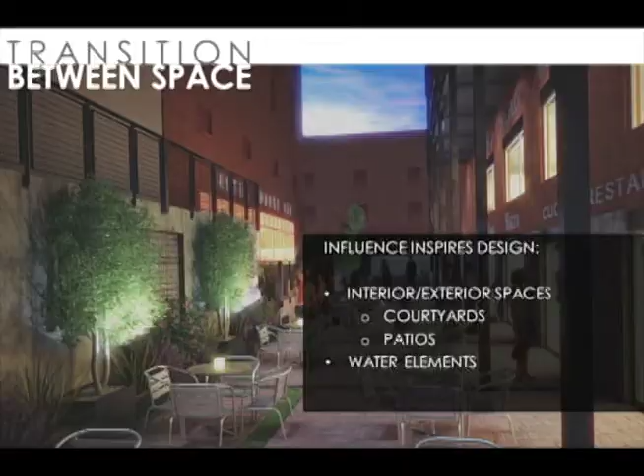Right. So tell me about this particular slide that we're looking at here.

So basically, I guess it's that transition between indoor and out. You can't build the Alhambra in El Paso with the very limited budgets that we have here. It's very hard, especially if you're trying to build with $100 to $150 a square foot - it's kind of impossible to do these palaces. But you can take the idea of the patio, the courtyard, water features, and try to incorporate that into my architecture.

Okay. So this is the animal hospital on the east side. Where could we find this? It's close to Montana, and what's the intersection? And Wedgewood, I believe. Okay, Montana and Wedgewood.

Okay, I can tell you a little bit about it. I had a client, Dr. Garza, and his wife. They approached me to do a new clinic.

So this is what their clinic was like. You can see here on the right, a very old building. They wanted to expand and make a bigger clinic, going from about 1,500 square feet to 5,000 square feet. But it was a challenge because there was an easement running between the property. They didn't have enough parking, and it was hard to fit on either side. We couldn't fit the whole program for the doctor.

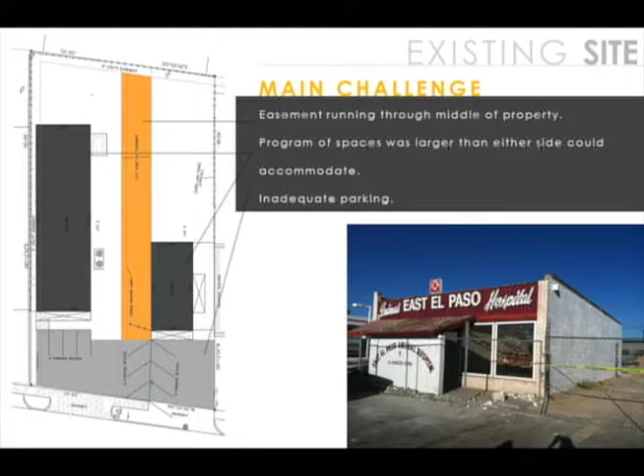So did you immediately tell them this has to go? Well, I told them I would look at it to see if it was feasible to leave it. But after looking at it and coming up with a concept of what we wanted to do, it was clear that it had to go and we had to start from scratch. But the challenge was that he wanted to operate the whole time we were doing construction. One of the big challenges is that he wanted to keep operating and never close.

So we had to work around that. At the end, we added a trailer out at the job site, and he worked out of the trailer. Then when half of it was open, he would use half of the building, and so on.

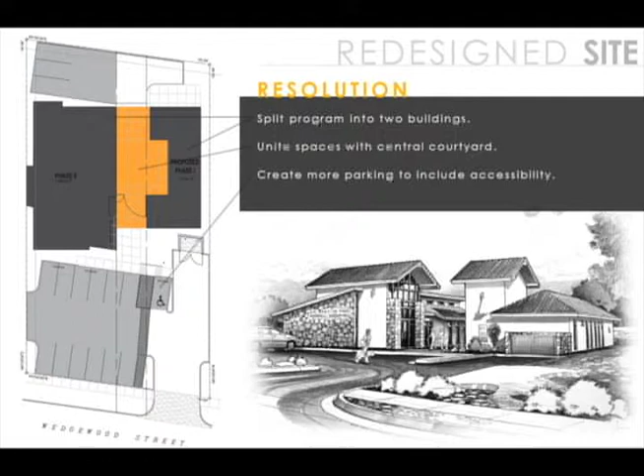So here's the solution. I created this same idea that I learned, to create this courtyard that would be kind of the glue that held this together. That's how we came up with this project.

When was the moment you went, this is where I can use my courtyard idea? You know what, I wasn't even thinking about the courtyard. It just kind of happened that once I started looking at the program of spaces and how things need to function, it just made sense to do it. I think it's something I subconsciously always think about, but I don't approach my projects saying that's what I'm going to do. It just, for whatever reason, appears in the project, and it seems to be an element in the projects I do that always helps me as an organizing element for my architecture.

So basically, the form of the project was that he was really in love with this metal roof system he wanted to use. That was kind of the only thing aesthetically, and he wanted rock. So that was the starting point of what this was going to look like. But there was an issue with the orientation of the building, so we wanted to have a nice entrance to draw people in. And if you look at it and walk through, it seems like just one building. Even though we have this easement running through the property, it's going to seem like one continuous building.

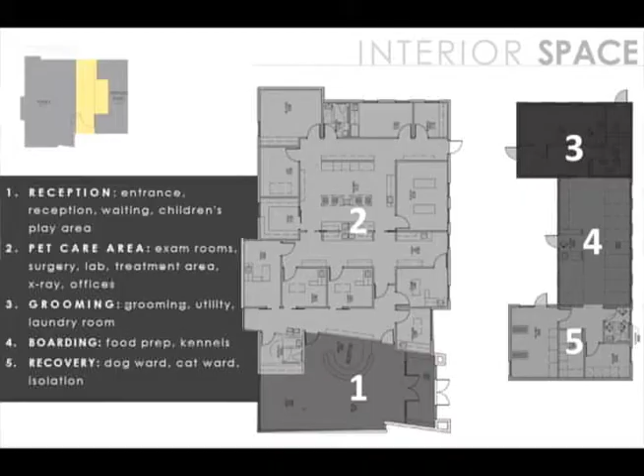I noticed on the previous slide that you have a prep area. Did you have some health issues that you had to address when you were designing it? Yeah, they have a lot of requirements that the doctor had that we had to meet, based on animal health and not having things spread around.

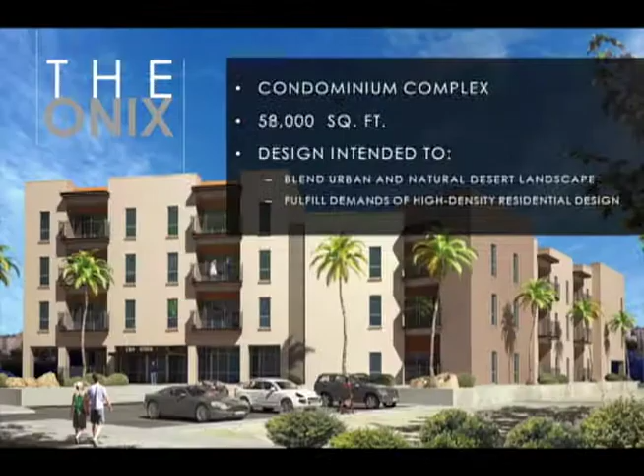So condominium - that's very different than the veterinary facility. How did this come about?

So the condominium project is located on the west side of El Paso, and it was actually a builder who does homes, but the economy had crashed, and he wanted to try to get into a condominium project. It was hard to get. At the end there were going to be apartments, but the idea was to do a high-density, very dense urban project that would fit in that area.

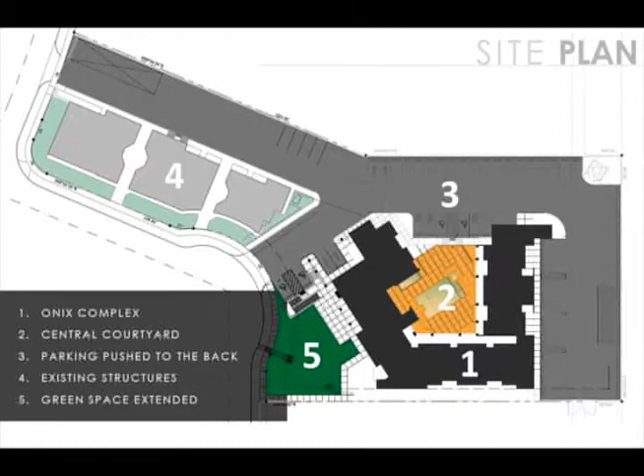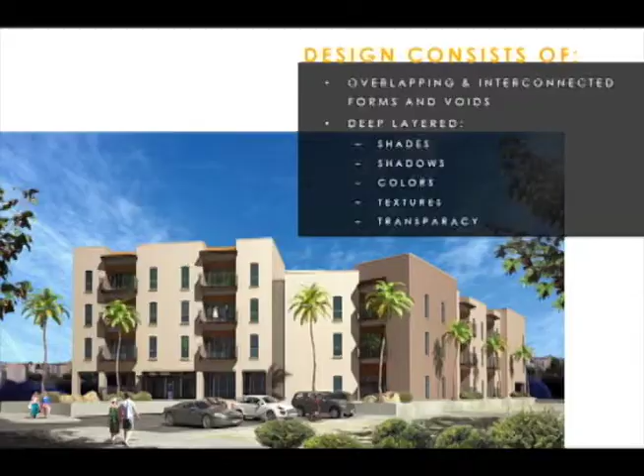The good thing about the site - it's not a very big site, but he wanted a lot of units. What's good about it is it's close to shopping, really close to Sunland Park Mall, close to restaurants, and also close to some medical and office buildings. So it was a good fit to try to put this type of facility there and have a good mix where you could actually work in that area, or if you're just there on weekends, you can walk to the mall or walk to get dinner. It's more the idea of a pedestrian type building.

Okay, so you mentioned the crash - what year did you do this? I started this about 3-4 years ago, and it was held up, and we're barely starting construction right now. So sometimes you start a project and you think you're going to finish it, and then you stop, and you go, and you stop and go. You just have to deal with those kinds of issues.

So the idea again was to create this courtyard. It just helped to organize the space again, but we pushed the parking to the back because we didn't want - we always have this parking lot in front of all these buildings, but they're really not nice spaces to be in and walk around in. There were also adjacent buildings to the left of the project, and we wanted to tie into that fenestration and massing so it seemed almost like one big project.

And then the other thing we did was expand the green space toward the front. So when you visit this building off the street, you really don't see the parking - you see a green space, then you see the entrance, and behind that you have the courtyard that ties everything together.

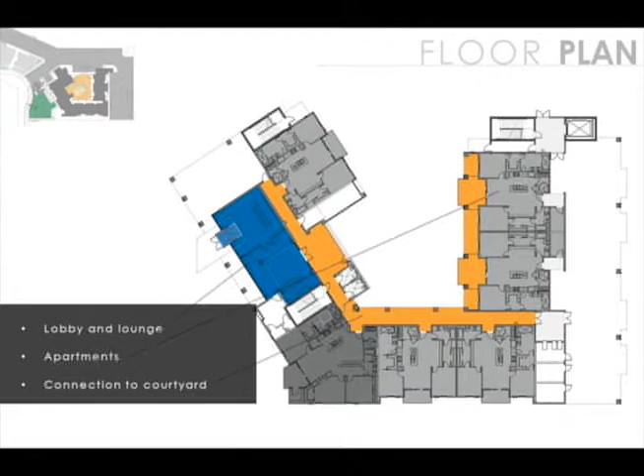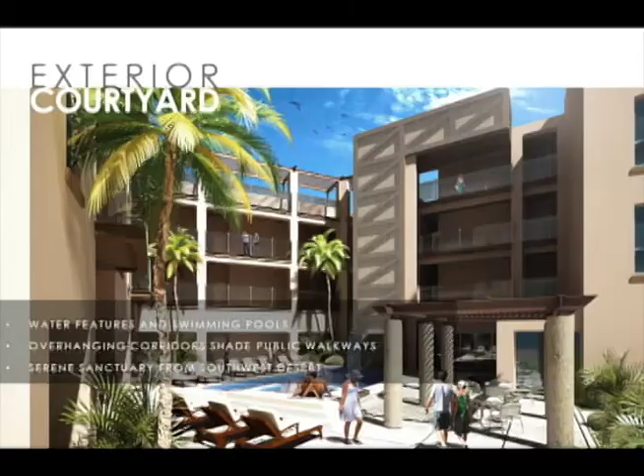So how was it working? This is a completely different client experience, a developer. Our idea of the developer is all he cares about is making money. The big issue here was always money. What is this going to cost me? What am I going to do?

We actually went through different renditions, changing window sizes, changing materials for the balcony instead of glass. We went to another option. You have to be very creative and stick to your guns, saying okay, I understand you have this, but we still need a rail. So can we find a solution or a nice design that still has this rail, but isn't pure vision, while still respecting the concept, the forms, the shades and shadows you're trying to create.

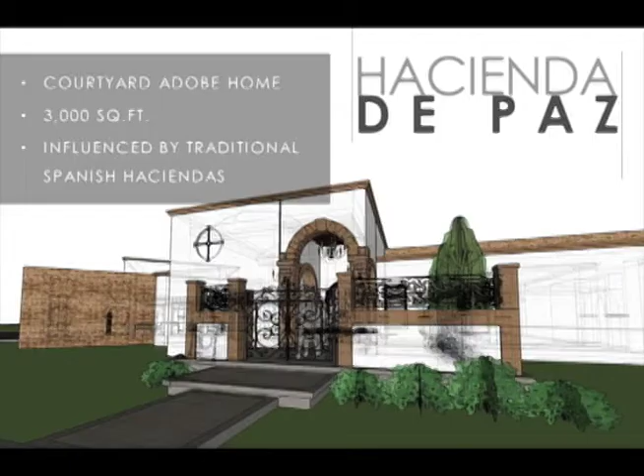Another different project. As you can see, I work on all sorts of projects because here in El Paso, if you're a small firm, you cannot just work on one type of project. You've got to work with whatever falls in your lap.

So this next one was Hacienda de Paz. A completely different client, an older couple, and it was going to be their dream home that they'd always been thinking about for years, that they're going to probably live in maybe 20, 30 years. It was out in the valley, and they wanted something that would reflect their memories as children living in Mexico. So the idea of creating this hacienda-style adobe home came about, and that was the starting point.

So again, thinking of that idea of the hacienda and the patio, we started talking about designing this, and we came up with some sketches. The concept was going to be a series of pods or buildings that would embody the experiences or activities that the couple wanted to do in the home.

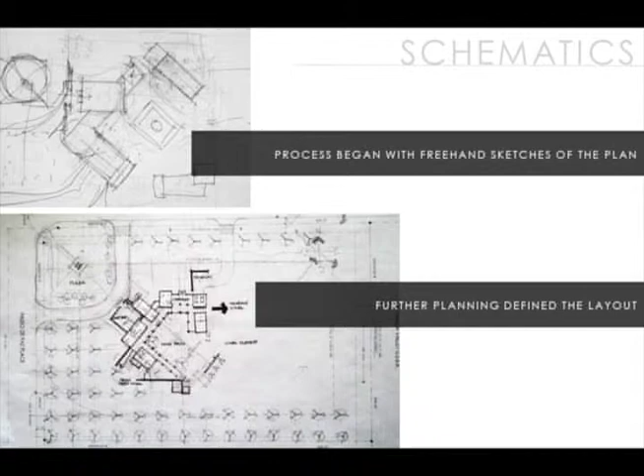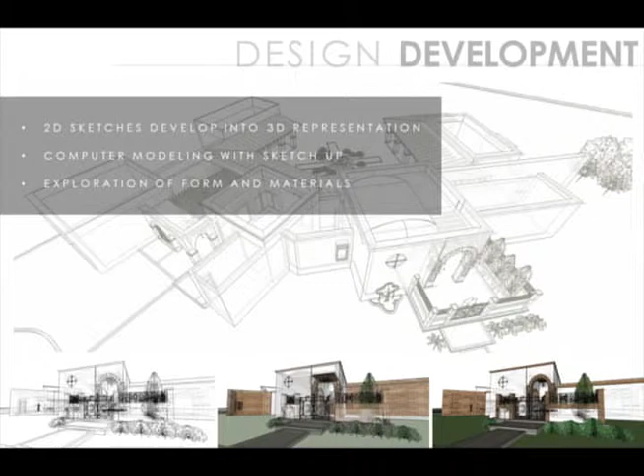From that conceptual idea, we started playing with the forms, making sure it's a modern building but still ties back to their culture through the materials we use and the way things are fenestrated on the building. It's still not a true hacienda home, it has a flair or a different type of architecture, more modern.

You mentioned adobe, so did you guys use adobe, or was that just the starting point? We looked at different options. Unfortunately, with this project, it's on hold right now, because the clients fell in love with the idea, but to do the adobe, you can't find that here in El Paso anymore, or even in Juarez. That used to be a big material used here at the border, but the only place you could find it now is up in Santa Fe, and to ship adobe from there or Las Cruces was super expensive.

So one of the ideas we were looking at is either doing hay bale or just stick frame, which I don't really want to do. So we're still kind of up in the air, and who knows if they are really going to do that. That happens sometimes, you get hired to do a project and at the end they decide it's too expensive, or we have to change and redesign and do something different.

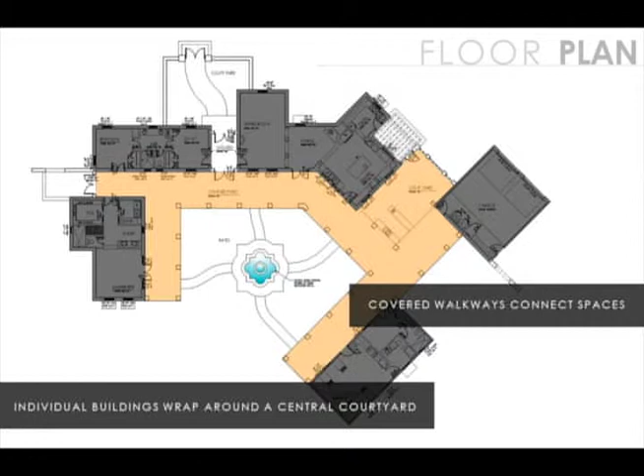So I was talking about these pods, kind of different experiences. She cooks a lot and gives lessons on cooking and dishes, modern Mexican dishes. Part of it is learning, and food was a big part of their experience. One pod was so she could teach other people about her culture and the way she cooks.

And then there's the kitchen, if you can see it over here in this area. It's almost half, or bigger than any of these areas. The whole kitchen's like that, so it's going to be a big gathering place. That was very important to the client.

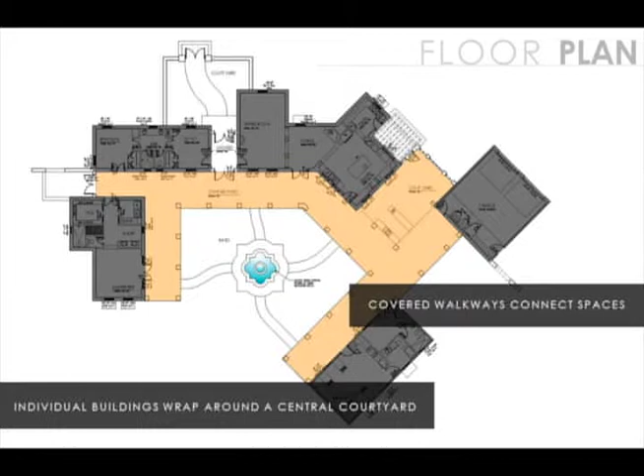And then we have the relaxation area, guest area, and the courtyard that would connect all these individual buildings, with a water element that represents life and how life rotates around family and friends. So that was kind of the idea.

So they planned on having lots of guests over? Yeah, is that how it just came about? That was what came in - at least grandchildren, and having their family come in and stay with them.

So which one is their main residence? Their main residence is this one. It's almost like if you go to a spa - they have their own secluded room or space they could go and retreat to, while all this could just be for family and friends. Oh, that's a great idea.

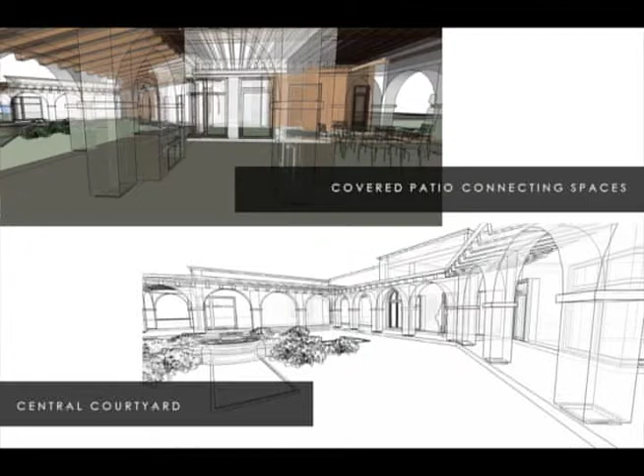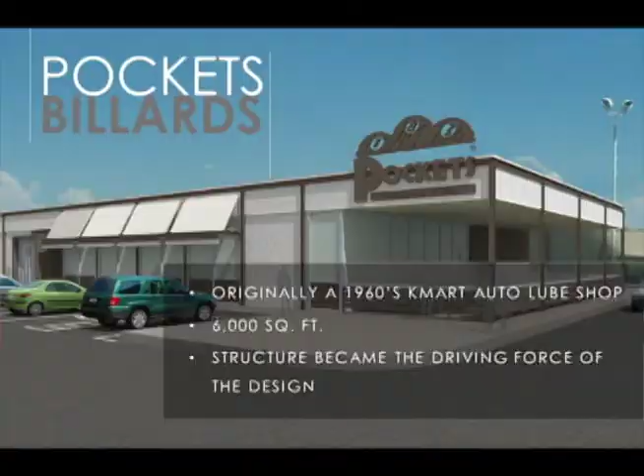No, it's not. So this next project is Pockets Billiards and Fun that I worked on. It's on the northeast, and the client wanted to do this pocket out there, but they didn't know where to do it. So we went about looking at different properties to see which would be the best fit, because they wanted just to retrofit - they didn't want to build anything new.

There were a lot of vacant buildings out in that area. Let me back up - this is what I first saw when I went out there. It was an old Lube Center next to Kmart, done in the 1970s, 1960s.

And the client was like, really? You think that's a good building? That was his first reaction. But when I saw it, I thought, you know what, this is a good fit.

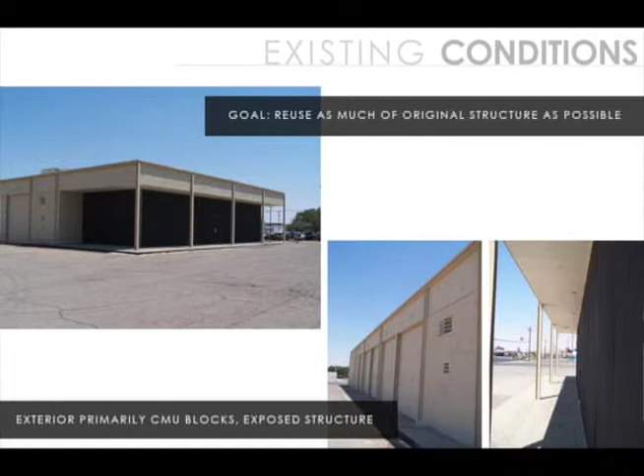It had a lot of parking, which they wanted. They were going to be able to negotiate with Kmart to lease the space at a very reasonable rate. The other thing was that it had very open space on the inside, very few little columns, which would help with the type of design they wanted to do, and their structure was very sound.

But as you could see, it was junk. I mean, what can you do there, right? So is Kmart still there?

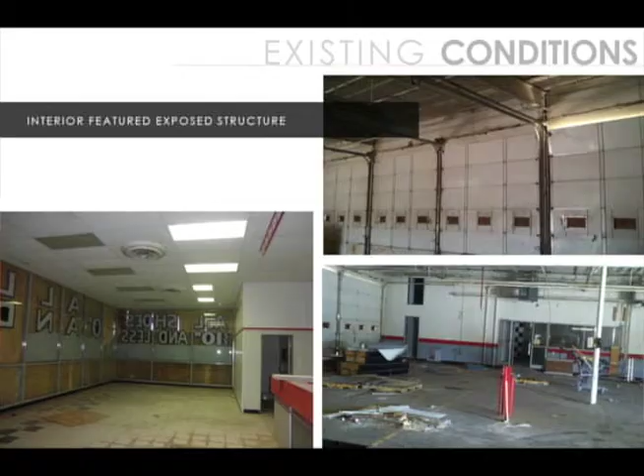Yeah, Kmart's still there. Okay, and you guys took over the lube area? Where they used to have - I think it was a tire center or lube center or something like that. Yeah. Is that the one right off Montana? Yeah, right off Montana. Okay.

So I need to know where to go play.

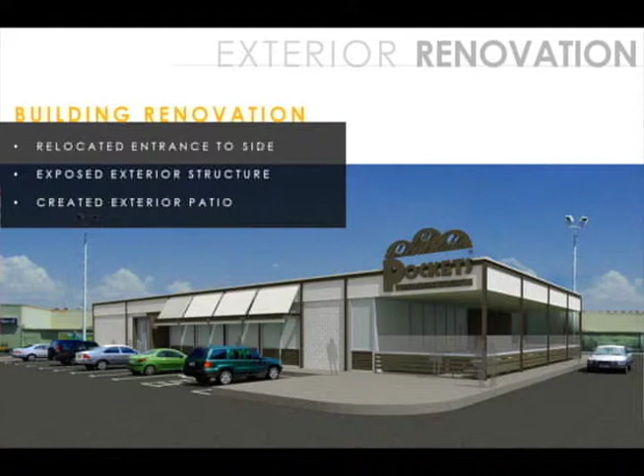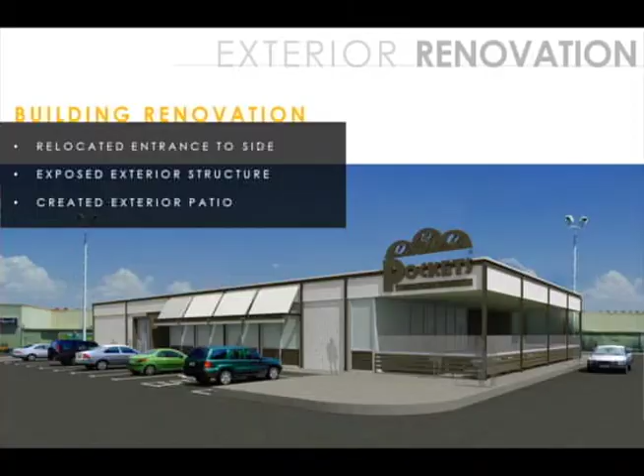One of the major concerns with the owner was to draw people to the pockets - to the restaurant, billiards bar, or whatever. So the first thing we did was relocate the entrance that used to face Montana to the side, and created a courtyard or patio area that would draw clients and patrons back into the billiards area. That was one of the things we really did.

The other thing was that we tried to respect the structure that was there, because that's probably the most expensive part of this, and we tried to emphasize the structure.

So here we're just looking at different options where the signage is going to go and how we were going to draw that. In the end, it turned out that the best place for it was close to the street, off of the patio area.

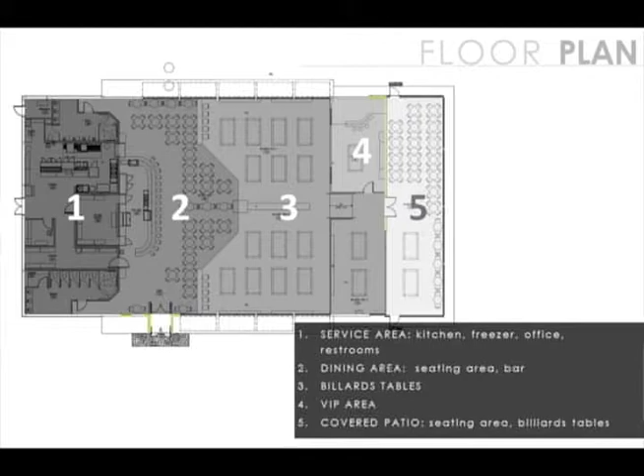A very simple project that helped me organize the space. We pushed the kitchen and all the work areas towards the back. The next space was the bar and restaurant area, then the billiards area in between the patio, which would cause movement inside the building, so people are always moving back and forth. Your architecture can help orient people and create the atmosphere the client wants, so people enjoy being there.

So we haven't talked about the client much. What was your experience once you told him this is the place, and he said 'Holy Moses'? Was he really into the creative process?

The first reaction was, I don't see it. Why do you like this? So the first step was always to come up with schematics. These images you saw are what we showed our client first, and that's when he bought into it. He said, yeah, that's a great idea, I think I could see this working.

He also saw the economic aspect of it, that he wasn't going to have to put much into it. As a matter of fact, it was between 50 and 60 bucks a square foot, which is nothing really.

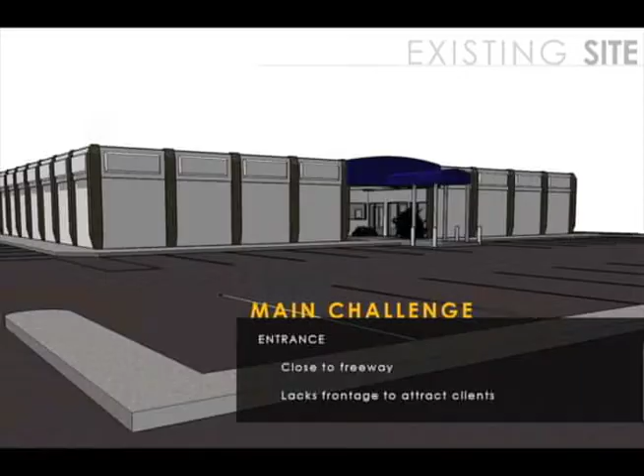Corpus Christi going towards Padre Island, but nobody would notice this building. The client was concerned about how he was going to get people to come into the building, to draw them in.

The other thing was the functionality of the building. It's just a box, but he has a lot of technology that he puts into what he does, and he wanted to make sure everything flowed. So those were the two major concerns the client had at that time.

So as I was talking about, here's the main challenge. This is what the building looked like when I first came up on it. He was like, what do we do? It's just a box and it has a really dinky, very short entrance. So that was my challenge right there.

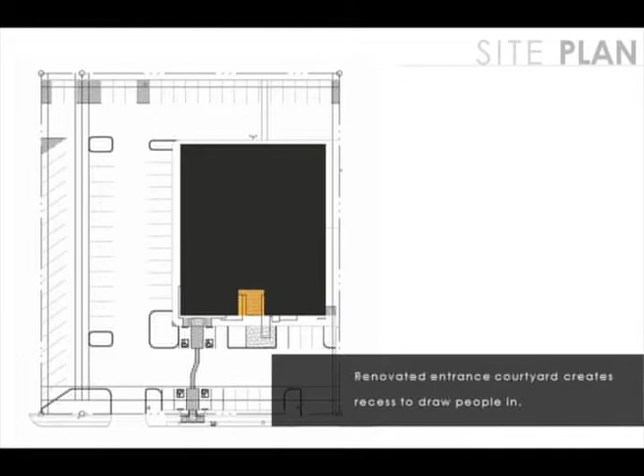So the first thing I did, again, I went back to what I like to do, and I wanted to set back a portion of the building because they didn't really want to mess with the structure. So we did a notch in the middle and created this courtyard idea, this transitional space that people could use to draw you in. That's what I started thinking about, without even knowing what I was going to do with the facade.

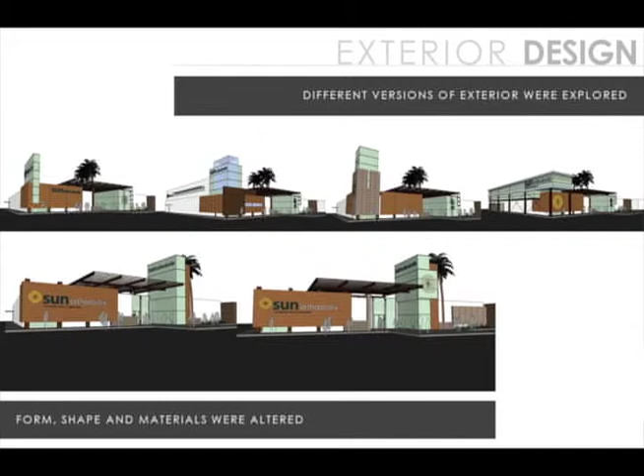So the next thing was, I started to explore what we can add to this box to draw interest to the building off the interstate. Here are some renditions of different options, like having a tower at the corner, doing a second story, moving the tower to the middle, playing with different materials, covering the courtyard or not, while also looking at the budget to see what we could and couldn't do.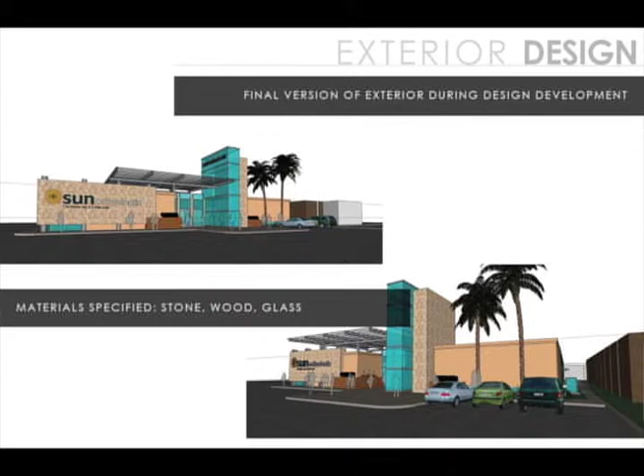So at the end, this was one of the final renderings of what we did. We decided we wanted a glass tower at one end with the name, that people would be drawn to, and then you'd be drawn right into the entrance with an intermediate space before you actually walked in. We made just a couple of moves on the building and it really dressed it up.

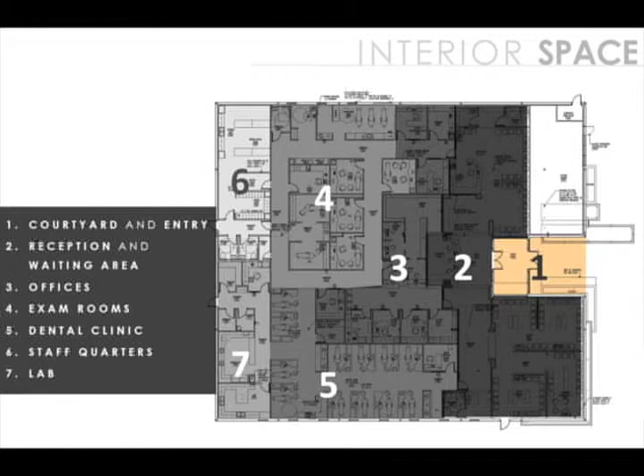In floor plan, as you enter the courtyard, the same thing happened — the public areas are towards the front and the more private areas towards the back. In the middle you have the space that's both public and private, like the dental chairs and the offices. It all flows in a circular motion to the front and back and out again. The doctor was really happy about how everything would function and how he'd be able to give better care to his clients.

So I take it he was really easy to work with, as far as... No. I guess sometimes doctors tend to be kind of arrogant, okay? That's the word. Any doctors in here? I hope not. Not all of them, but he seemed to — they do a lot of study and know a little bit about everything, so they're pretty opinionated about what they do. You have to be very careful about how you approach them.

That's fine, sometimes you have to work with really hard clients. But at the end, after going through various changes, he was happy with how it turned out. One thing that was very important to him was that his doctors don't walk up and down from one side of the building to the other. So we created clusters of areas — if a doctor was in one area, he pretty much stayed there, because they get tired of going from one side of the clinic to the other. That was one of his big pet peeves; they lose a lot of time walking back and forth to talk to patients. He wanted to bring patients in as quickly as possible and get them out as quickly as possible for the best service.

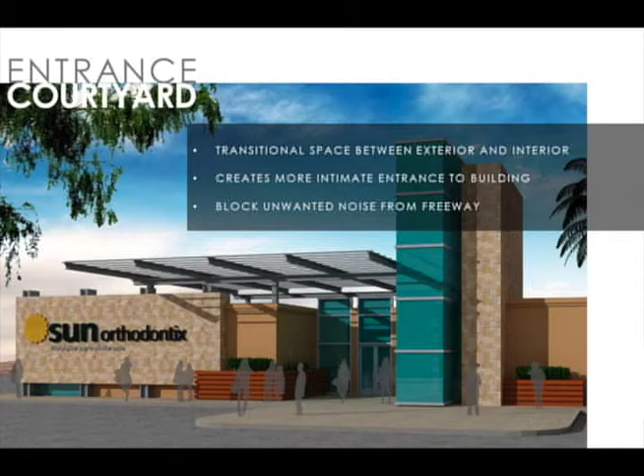So what is this mixed-use building, and where is it? This is at Union Plaza downtown, the heart of El Paso — that area you've probably already been to, with all the bars and restaurants. I worked on a project in front of it, and now I'm working on this one, trying to revitalize that area. The client wants retail at the bottom and some efficiency apartments above. It was important to him to make some kind of connection, since he also owns the other buildings behind, so he wanted to somehow connect them.

He had a basement area, and he wanted to take advantage of the space in the basement. So those were the challenges, the only thing the client wanted. And of course, being in El Paso, budget was a big issue for him and that group of people.

This building was done in the 1920s. I did a little research about who did it and what had happened, and it's always been a mixed-use project where they had efficiency apartments above, probably for people who worked in that area in the 1900s, and also retail. At one time it was a tire shop, and at another it was a furniture store. But for years it sat like that with nobody occupying it, so we're trying to revitalize it.

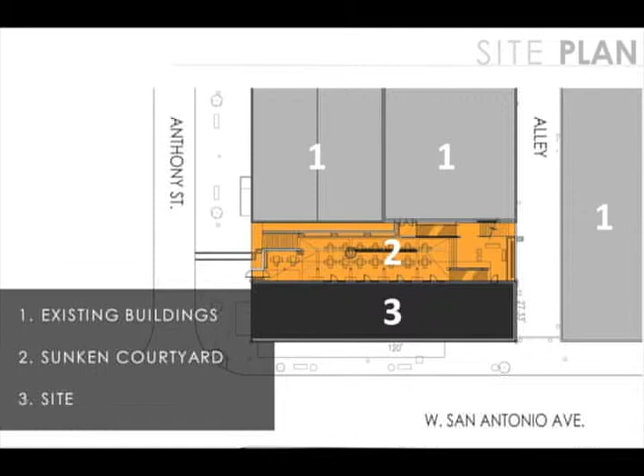So then you're working on this entire block? I'm working on the entire block right now, but the main thing we first started with was the patio in the building.

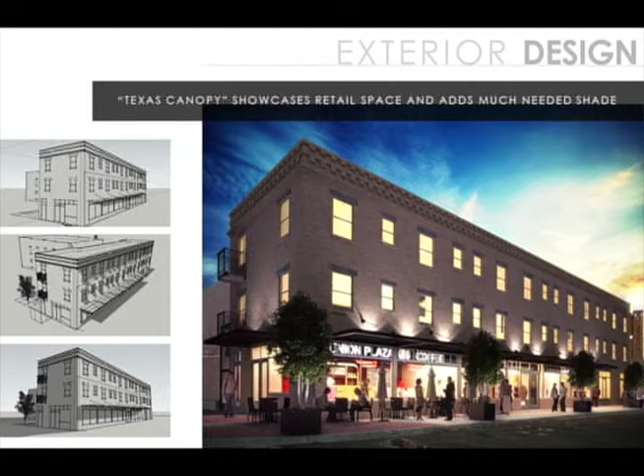The main challenge here was that I wanted to respect the front of the building, because it was already really nice. So all we're really doing is replacing the windows and the fenestration, and then we added a Texas canopy. Why a Texas canopy? It gives you that sense of shelter and also draws you to the lease spaces or retail spaces. It's almost like an eyebrow that breaks the building up. So those were the only things we did to the front, just cleaning up the building and opening it up for people to enjoy.

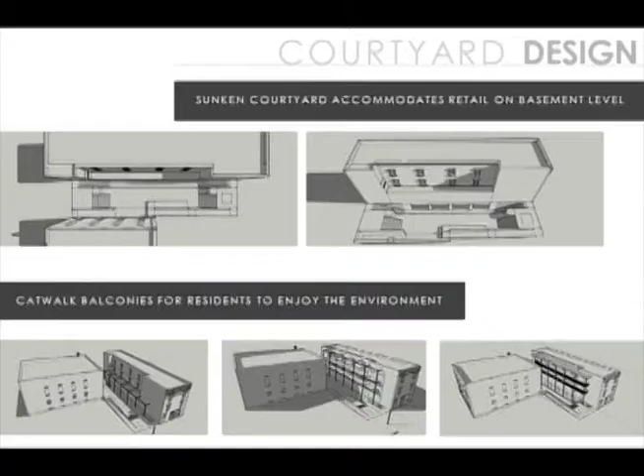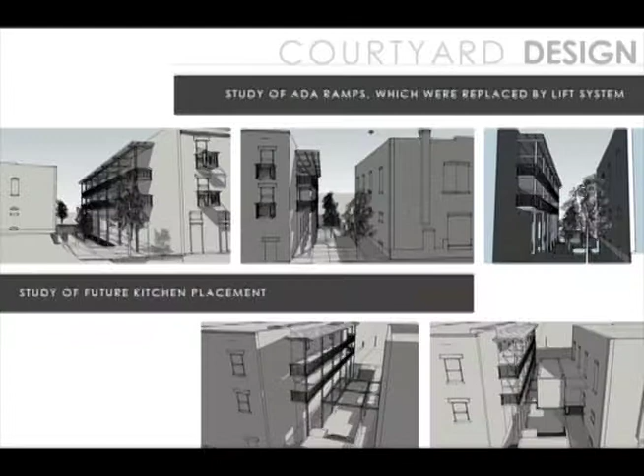The other thing we worked on was the courtyard. We had different ideas about what to do there. We actually added a catwalk in the back to increase the square footage of the apartments. With all that said and done, this is the image of the sunken courtyard with the catwalks above for the apartments, so they could look down into the activity, the partying or whatever is going on below. That's kind of the selling point.

As you can tell, at the bottom there's retail space that they'll now be able to use, and also on this side. And when will we see this? Probably early next year, this will be ready.

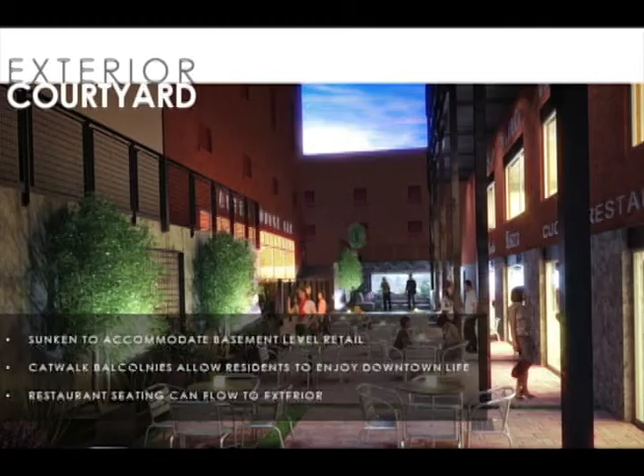So here's an image of the sunken courtyard again, adding a water element and some landscaping, still having that relationship between buildings and that blurring effect between interior and exterior space.

A warehouse now? Yeah, so the next project I'm working on is a warehouse, completely different from everything else. The only thing the owner wanted was a program of about 40,000 square feet of warehouse space. He wanted some office space, and he wanted a dock area, though he didn't know how that was going to work. He had a piece of land, so that's it.

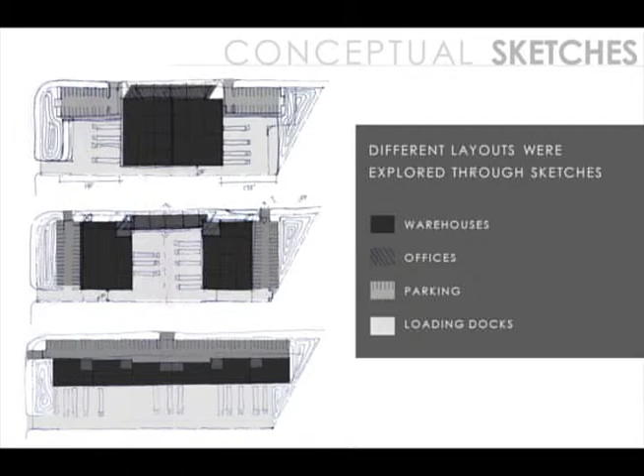He didn't know what he wanted to do, so I offered to do a series of options for what we could do with the property. I started with a series of sketches: one with a big building in the middle with docks on either side, one with offices in the middle, warehouses to the right, and parking, and one that was just long, almost like a shopping center with the docks all in the back. At the end we didn't even use any of these, but that's part of the process.

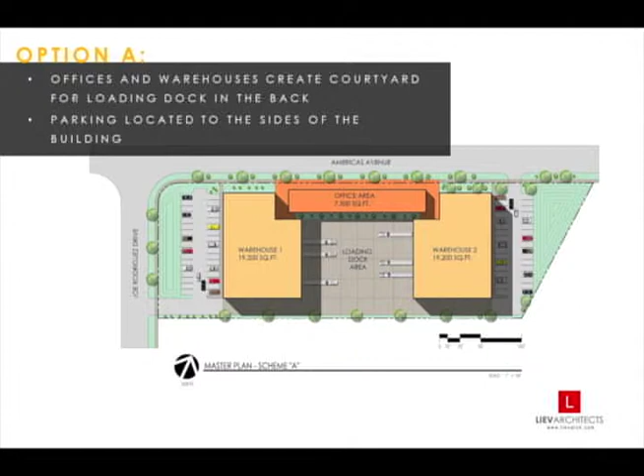So I just started looking at all of that. From there we started looking at those more closely and actually doing some more in-depth drawing based on scale and whatnot. So here's the two warehouses and then the office in the middle.

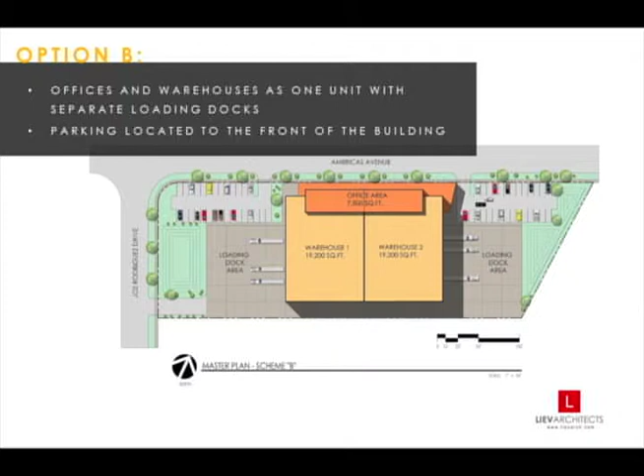And then here's the two warehouses together, making one big warehouse with the office on top, parking in the front, and then the docks on either side. And then here's kind of like, let's try this, put a little bit of parking in the front, some to the side, and then still offices.

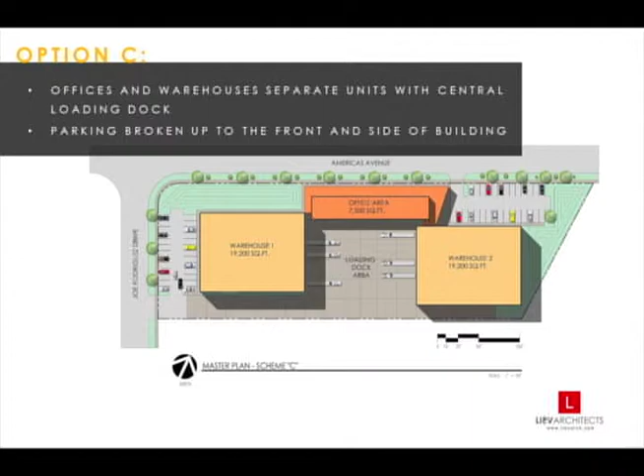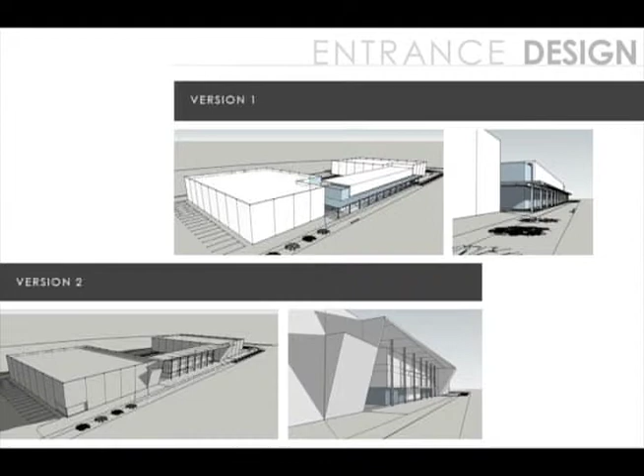The other reason that was important was that he wanted it from the front, which is on Zaragoza, the interstate here. He wanted that image from the front not to read like a warehouse, but to read almost like an office building. And he wanted it to be kind of like one big building, but split into two warehouses where he would take half and lease the other one. He really liked that idea, so that's how we went ahead and approached that.

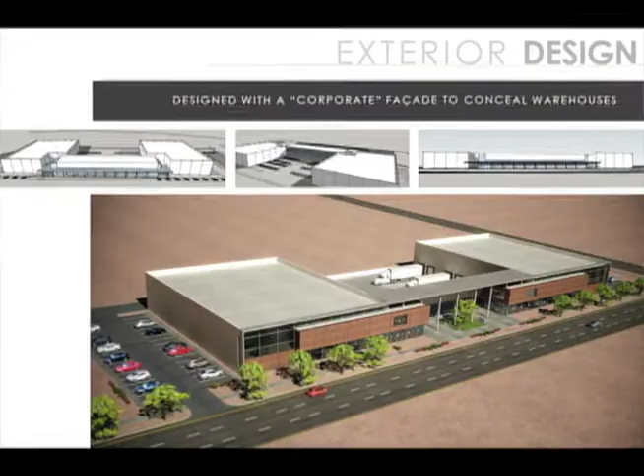So the next step is that we actually did a series of mass models, or massings, to see what this might look like, and we went through a lot of variations about what that might be. But here we are, at the end, at the bottom — that's what the building's actually going to look like.

We're letting a lot of natural light come into the warehouse and also into the office spaces. And we have this plaza right at the middle that will greet people as they come in from the parking areas, and then you can choose to go right or left depending on who you're there to visit. So again, the idea of the courtyard as the tying element between these two buildings, and then a covered patio area that intersects and connects the whole building together.

Well, and that's it. Those are all the projects I have today to show you guys.